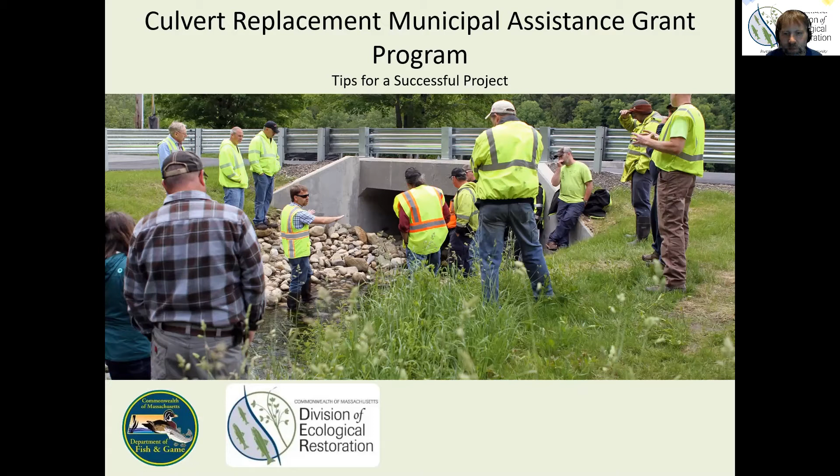Before you begin a culvert replacement project, DER recommends spending some time on initial data gathering, analysis, and discussion that will help you plan and develop your project. This initial assessment requires little effort and investment and will help immensely in project development. This is not a complete list of the things that you should think about, but the topics I will mention are important.

There are plenty of culverts that need to be replaced in Massachusetts, and the odds are that every municipality is aware of quite a few. Since these upgrade projects can take a considerable investment of time and money to complete, it is important to make sure that you choose your projects well and set them up for success. A well-implemented replacement will pay off over the long term.

A good project is set up to allow the culvert to be replaced with an upgraded structure as efficiently and painlessly as possible. There's no one right way to go about a culvert replacement, but in general, you will be setting yourself up for success if you have clear goals, knowledge of the site constraints, and a solid scope and plan for the future.

So what are the project goals? The overarching goal is painfully simple, right? Replace the culvert. It's not quite that simple though. Any long-lasting infrastructure project like this should consider the needs of a range of stakeholders. It is important to have all the necessary stakeholders involved in developing the goals. You do not want to miss something and find out when it's too late.

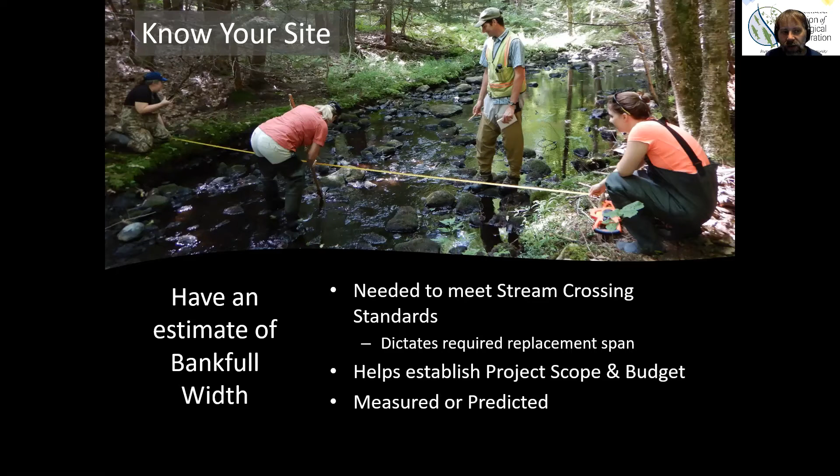For a new project, you can either measure bankfull width yourself, ask your Conservation Commission or conservation agent. If you already have a consultant engaged, you could ask the consultant, or you could ask us and we can provide resources on how to estimate and or measure bankfull width. We can only answer those questions before the RFR is released, though.

Since understanding bankfull width is so critical to a culvert replacement project, I'm going to linger on the measurement for a moment. We need to be careful where we measure bankfull width because an undersized culvert can affect channel characteristics, including bankfull width, and as a result, cause us to pick a culvert that is either too big or too small for the site. This is not something you want to find out later in design, or worse yet, when you are done with construction.

During the design phase, DER recommends project managers or conservation commissions to require that plans indicate where bankfull width was measured to allow for verification that the measurements were taken outside the influence of the existing culvert.

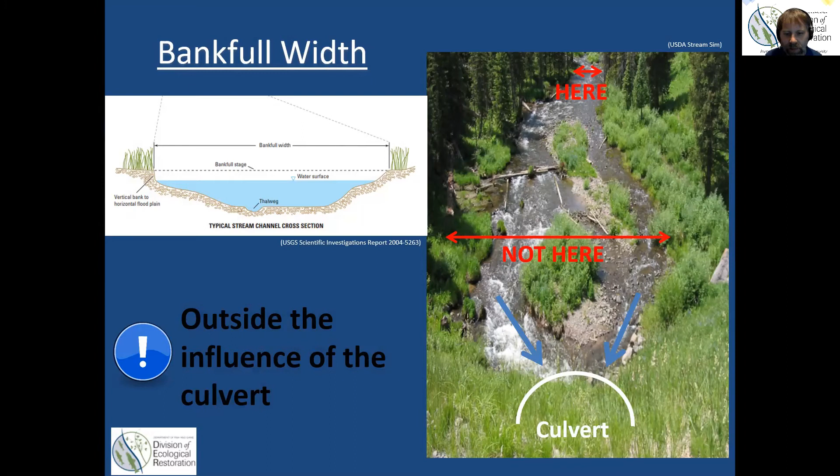In addition, there are other aspects of the site and the watershed that it is helpful to understand as you plan your project and consider whether it is a good candidate for seeking DER funding. These include things like history of flooding at the site. Any documentation of flooding history or costs associated with it are great to have. Other barriers, for example, dams or undersized culverts that exist on the stream. It is very helpful for both project planning and for helping us at DER think about your site to know about these other barriers. Nearby barriers to wildlife or to water help put the project in context. I will touch on that more in a minute.

Also, past or expected changes to the watershed or to the roadway are important to know. This is your chance to plan for the next 5 decades or so if you replace the structure correctly. If you expect the road to need more use or the area to become more or less developed, you should consider that in your planning. It is also important to understand that land use can have impacts on flood frequency and flood size, habitat quality, water quality, and other factors.

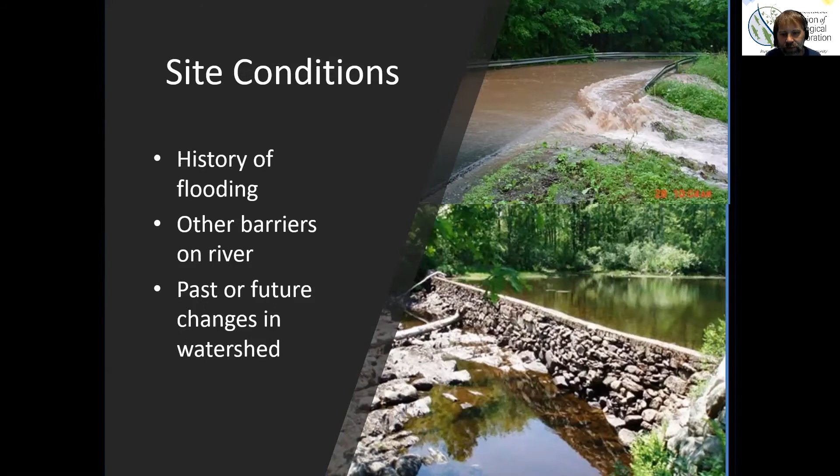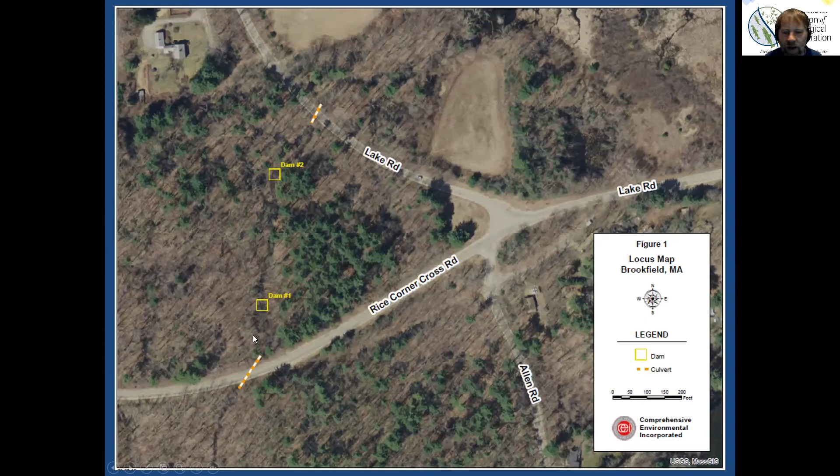This is an example from one of our training sites that highlights why it is important to think about other infrastructure on the stream. In this example, the stream flows from the bottom of the screen toward the top. The aerial photo shows the culvert that is being replaced on the bottom, followed by two small derelict dams downstream of the culvert, Dam 1 and Dam 2, as well as a culvert downstream at Lake Road. This is important information about the site for two reasons.

Dam number 1 is failing. In fact, it's already breached and is unlikely to be holding back sediment throughout the design life of the replacement culvert. It is close enough downstream that when it is gone, the stream bed at the replacement culvert will change in elevation. This is something that needed to be evaluated in the culvert design in this case.

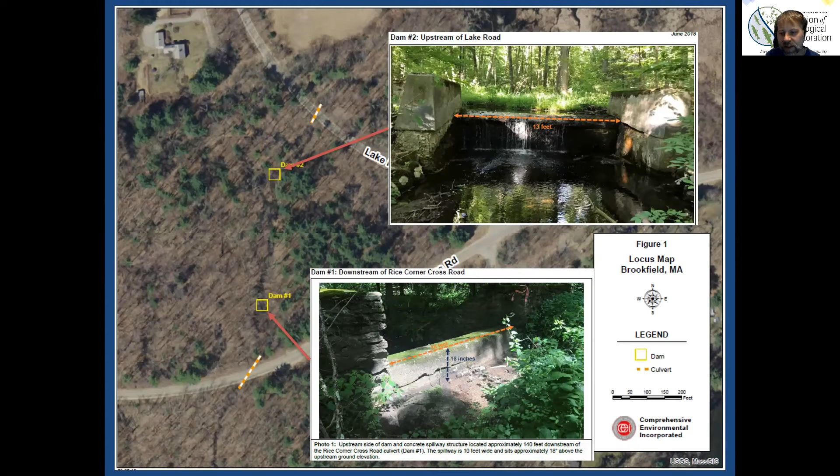Also, the nearby migration barriers for fish and wildlife limit the amount of habitat improvement that can be expected when the culvert's replaced. This would affect the environmental benefit of the project unless there are plans to address the other barriers. Knowing about upstream and downstream infrastructure will help with design and will also help evaluate the environmental benefit of the project.

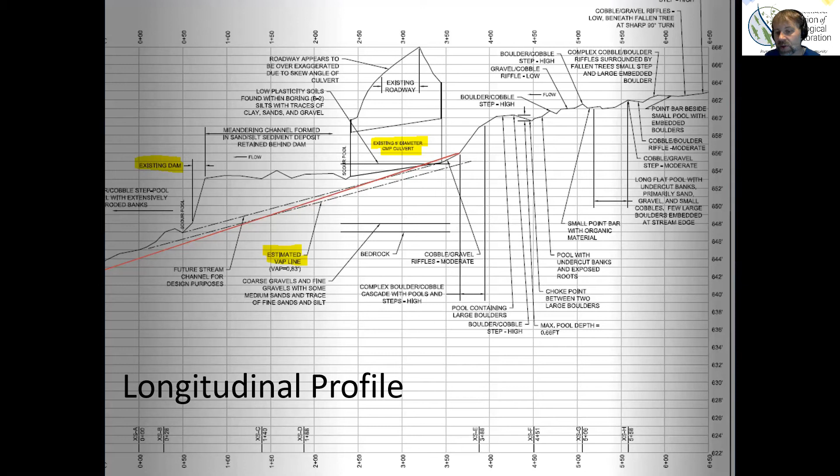As you can see, if the structure were to be replaced at the same elevation, and the dam were to wash away or be removed, it may perch or undermine the new structure, causing a new migration barrier for fish and wildlife or shortening the structure's life. It is helpful to identify any of these upstream or downstream grade controls as early in the process as you can to inform the scope. During the design and engineering phase of work, your consultant should survey a longitudinal profile well upstream and downstream, usually several hundred feet in each direction.

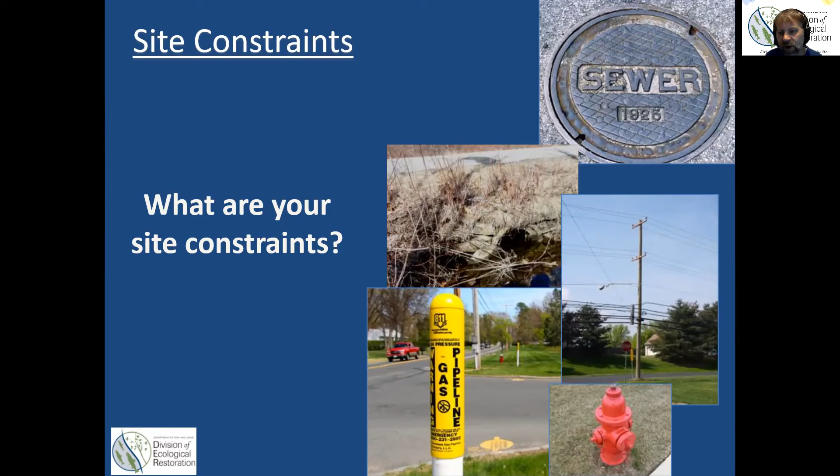When you are scoping a project, there are often easily identifiable site constraints that you can flag based on your experience with the location and/or a quick site visit. The site constraints that I mean are things that can't easily be moved or can't be moved at all. For example, things like the height of the road fill over the structure, whether there's a sewer or gas line through the road, whether there are houses adjacent to the culvert, or other things that you see when you're on the site. It's important to identify and understand those features up front so they don't become costly redesign issues further on in the project.

So a question to ask yourself is: is my project a good fit for the CRMA grant program? Before you spend time preparing an application for CRMA, it's worthwhile to evaluate whether you think it is a good fit for the program. This is true with any grant program you might approach. Since DER generally receives a large number of applications, it is worth your time to consider whether the project you're submitting is the best fit of the structures that are on your town's high priority list.

It's of course important that replacing the culvert is a high priority for the town and that the town is committed to the project. But your number 3 structure may be more competitive than your number 1 structure. Think like a grant reviewer. Consider the scoring criteria and try to put yourself in a grant reviewer's shoes.

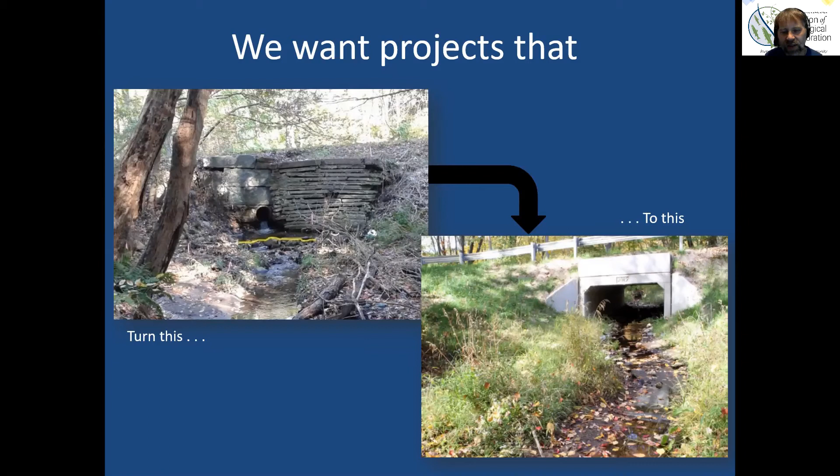So some questions to ask yourself when you're thinking about fit. For a project to be a good fit for the CRMA program, it will need to have strong overlap between environmental and public safety benefits. Among the things you should consider are: are the environmental improvements substantial? I'll touch more on this one in a minute. Second, is this a priority project with a path forward? Whether this is a true priority for the town is important to consider. And has the town considered ways to invest in the project? And is the town committed to moving the effort past the CRMA funded stage?

And third, will the project meet the stream crossing standards? Meeting the stream crossing standards is at the core of the CRMA program. If there are clear site constraints that are likely to severely limit your ability to meet the standards, your project may not be the best fit for the CRMA program.

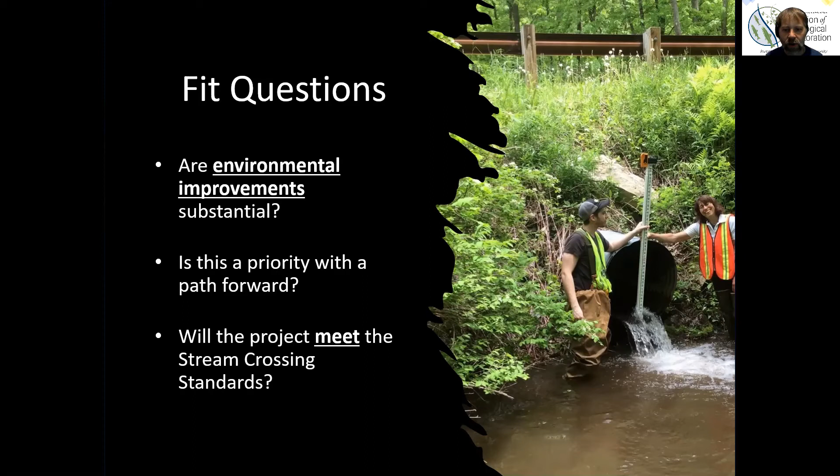So back to the environmental context. It is important to consider the environmental context of your project. We don't expect you to be an ecologist, but you should be thinking or asking someone whether the project you are proposing is going to have a substantial habitat benefit. To the extent possible, try to look at the bigger picture.

Are there nearby barriers, as we discussed earlier, both upstream and down? Is there a plan to address them if they're there? Are there things that you can identify like parkland or other open space upstream and down that this might be connecting that might improve the habitat value of the stream?

Are there other stresses to the stream that you can identify? Things like heavy development pressure, intensive agriculture, or water quality issues that even when you improve the structure are not going to be addressed. Those are things to think about and to know and to share. There are some desktop tools available to look at this, including some referenced in the appendices that are included in the grant materials in the RFR.

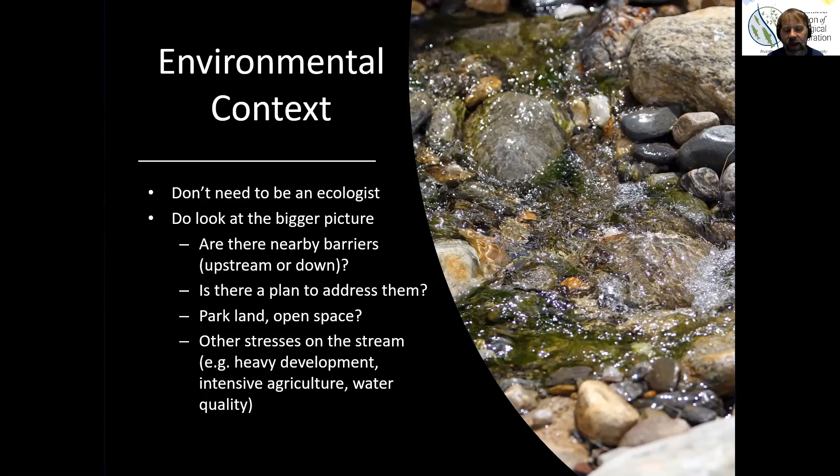You can ask us our opinion during the pre-RFR period, or you can ask your Conservation Commission or other people who know the stream. If it seems like a stretch to you or to others, maybe you should look at other projects on your list and see if they seem like stronger candidates. When you prepare an application, tell us everything you know about the ecological context of your project, and we will do our best to evaluate and to see if we can find more information.

Having established clear project goals can often help define why the project is a priority for the community as well. In addition to the ecological and environmental benefits of projects, DER evaluates projects based on a variety of community benefits, things like public safety, whether the improvements affect public safety and health, reduce risk to the community by eliminating a hazard, or improving emergency response capability, reducing flooding.

Economic impacts like positive impacts to the local economy or cost savings. Community benefits like reestablishing community connections, enhancing recreation or access, or other things. Providing specific details on how the proposed project will benefit your community is helpful to the CRMA grant reviewers. It's more helpful to be specific than to provide general information.

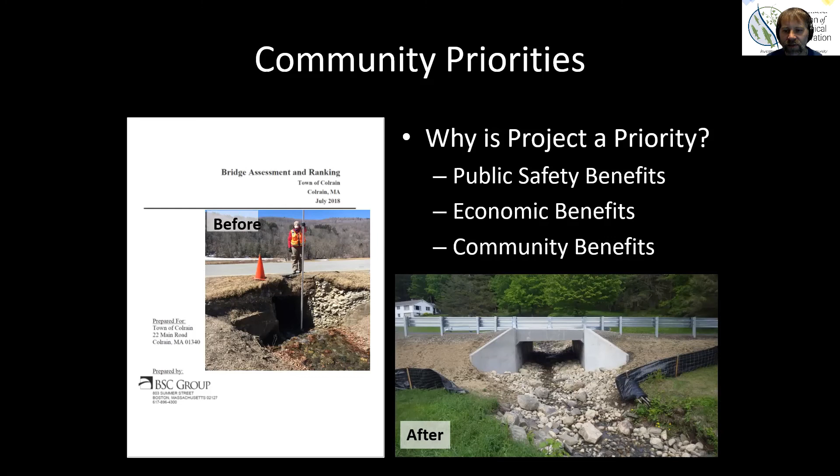Is the scope appropriate and realistic? Having a scope that is well thought out will help you at every stage of a project, whether or not you're coming to us for funding. Almost all culvert replacement projects will span more than 1 year from start to finish. So you should be thinking of your project scope at more than one time scale. For the CRMA grant, your scope should only include work that can be completed during the grant period.

You should know what permits to expect and the timelines of those permits, especially if you're addressing permitting as part of your CRMA application. And know what it will mean to meet the stream crossing standards at your site. As I mentioned earlier, if you don't know what it means to meet the stream crossing standards, it's very hard to have a clear scope and to know what your project is going to look like. For the broader project, it's important to understand what your next steps will be after this funding cycle and have a plan to move past this cycle through to completion.

CRMA grant reviewers will be looking to see that you are thinking on both of these timescales as well. We want to help boost projects that provide solid benefits, and we want to boost projects so that they are likely to be completed. So while we want to see a one-year scope, we want to see that you are thinking at a broader time scale and have a path forward to completion.

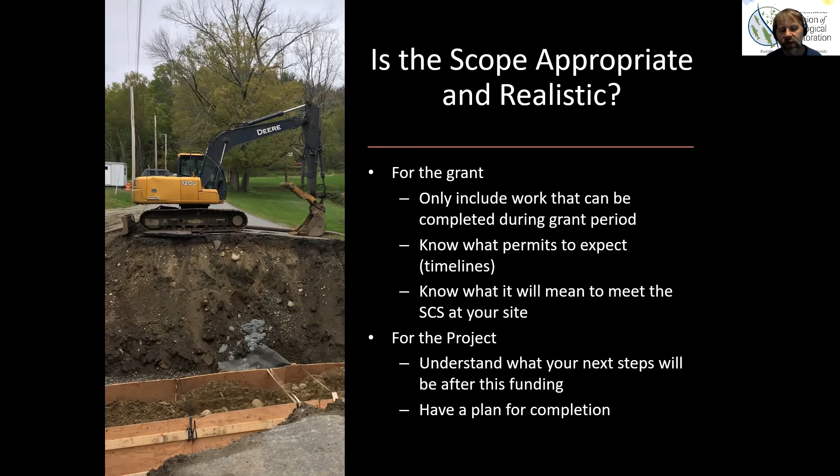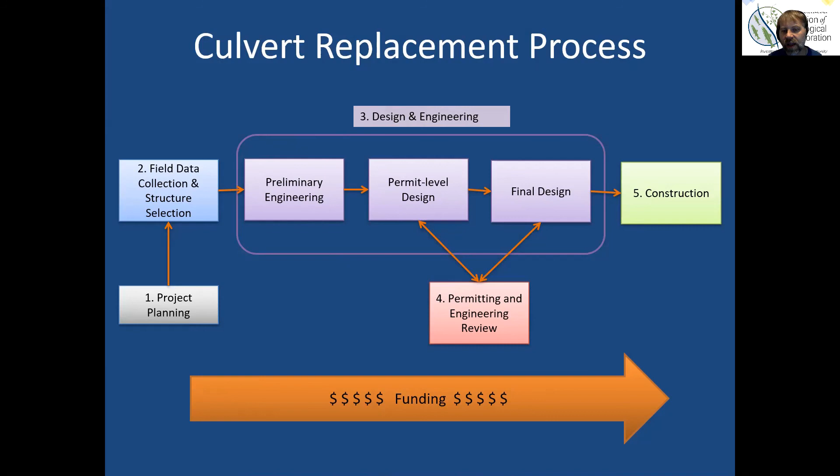This will help you identify how you are going to fund the whole project, and it will help you describe your plans in your CRMA application. It may also help you identify other funding sources that can help you and when you would want to approach those sources.